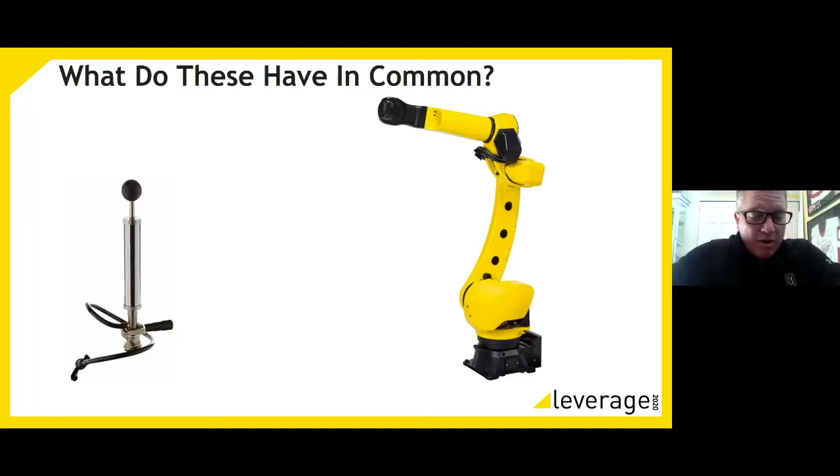So I'd like to operate under the assumption that if you're listening to this talk today, you're looking at buying machine tools or looking at automating machine tools. So today we're gonna start out with a little joke because I kind of like to joke around. I like to think about what do these two things have in common. Obviously the one on the left is something I was very familiar with in college, and on the right there is a robot. But I like to use the analogy that they're both used to tap into unrealized potential. And if you're here on this webinar today, you're looking at optimizing your machine tools and optimizing your automation.

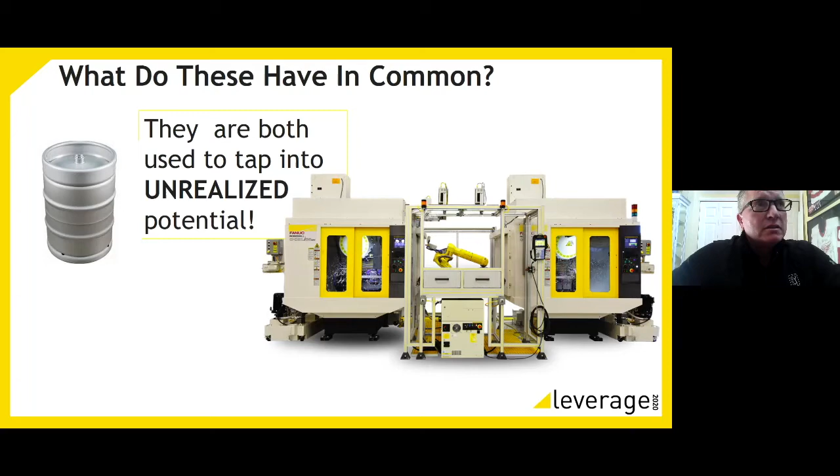Robots and machine tools together create an amazing synergy. So the things that we're going to talk about today is why are we going to automate your machine and what synergies are we looking for? We're going to address some key numbers that you may have heard before, but if you're looking to make that decision on finally automating or finally buying that machine tool, these are good reminders and good numbers to make sure that you're prepared for what the future has to offer us. And then we're going to look at what COVID has done a little bit and some early on comments by Mark Cuban. And then we're going to address some myths.

If you're looking at automating your machine tool, you've got a workforce to address and be concerned with, and they may have some antiquated theories and thoughts about what robots really are. We're going to discuss a few challenges of the machine shops just at a very high level, as well as some of those solutions, and also introduce the CRX as a cobot to the rescue in the machine tending space. And then the last slide will just be how we can connect you with the Productivity team and the FANUC team to make sure we offer you the solutions that make your shop more productive.

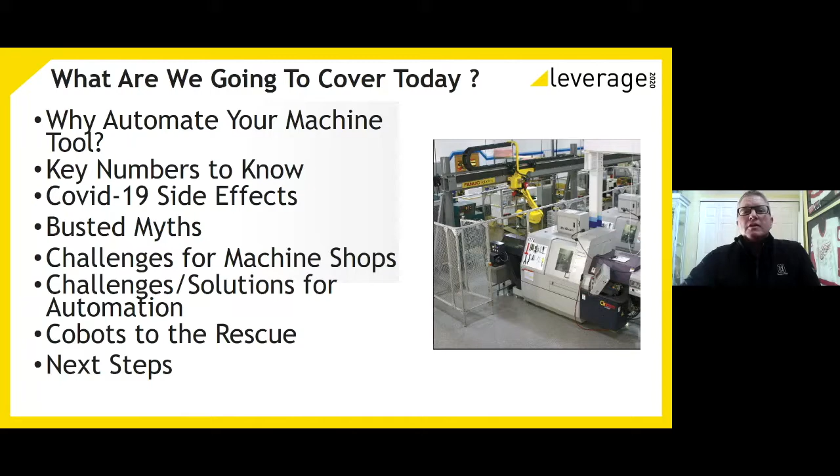So to jump right into it, we're looking at a shortage of 3.5 million jobs in the next 5 to 10 years. That's a very scary number to me because those numbers are very difficult to ascertain. 2 million today, right now, is what is required to fill the skills gap. And I had the privilege of speaking with some recent graduates at Oakland University, and I asked the question, how many of you would like to go work with robots when you graduate? And every hand went up. But then I asked the question, how many of you would like to be working in a factory? And unfortunately, there were not very many hands in the air.

And I felt to myself that it's very unfortunate that the student of today does not have a grasp of what today's factories are. They've been growing up under the assumption that the assembly line under Henry Ford is what factories are, and that is the furthest thing from the truth. So there is a paradigm shift that is required. And I think that what today's environment is going to afford us is the opportunity to expose robots and machine tools to the masses. Another key number as to why automation is going to be expected is the number of Americans that are retiring on a daily basis.

I actually think COVID is going to accelerate some of this. For those of us in the workforce and in the machine tool space that are in the last 2 to 3 years of our career, fortunately I'm not there yet, but for those of you that are lucky enough to be there, you may say that this environment is not what you want to do and you may retire early. But regardless of what COVID is doing, an average of 10,000 Americans are retiring daily, and that's just out of our industry, I believe. Let me double check that number. 10,000 Americans retiring out of North America. Let me say that, I'm confident there. Sorry about that.

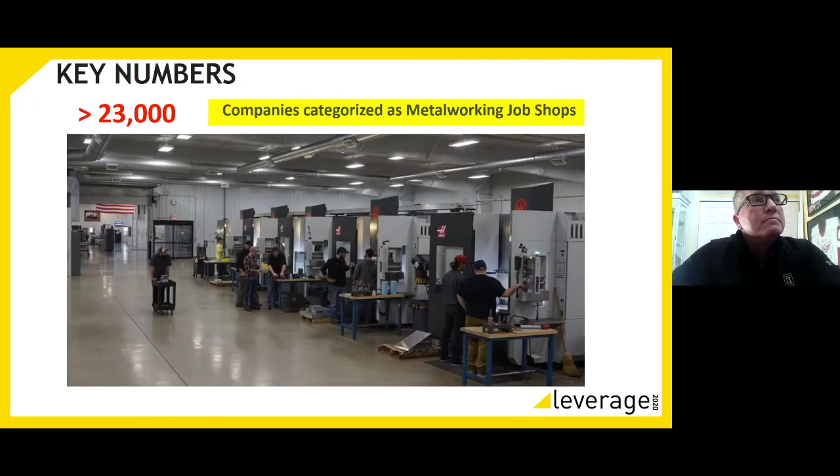Another key number is in the United States, we estimate that there are over 900,000 CNC machines installed. FANUC has a very high privilege of being one of the most common machine platforms on the market today. So having the robot and the machine tool talk is obviously a huge goal of everybody, to make that connection easy, to optimize your machine tool and to optimize your robot.

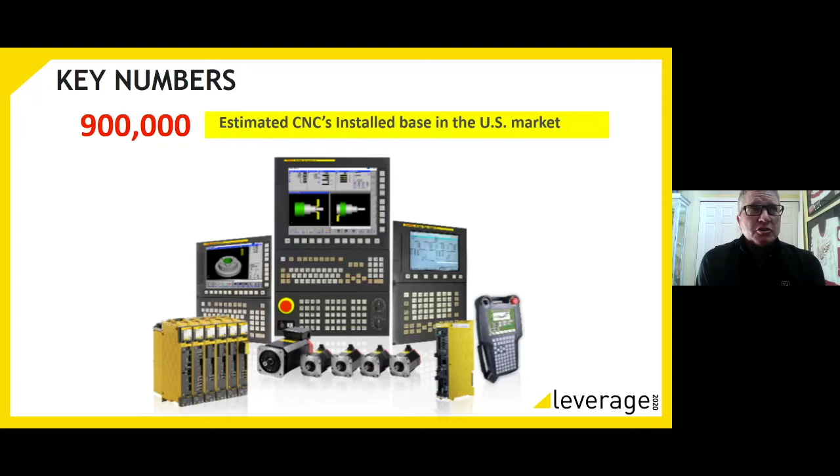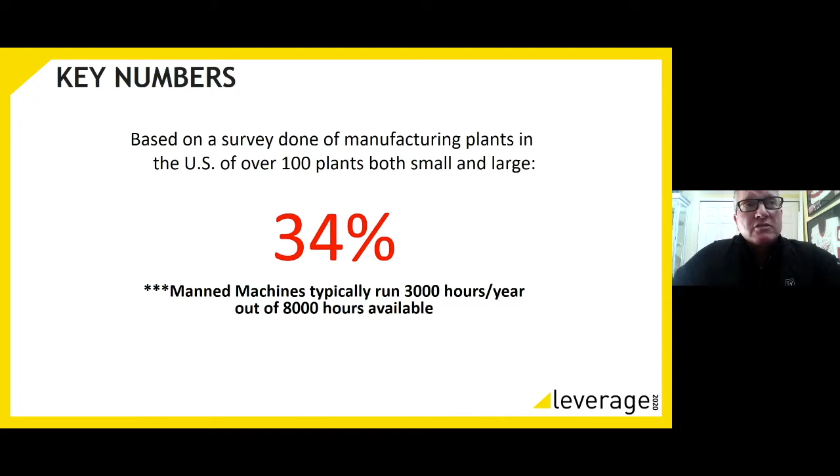The 34%, that's an interesting number. Right there is the average spindle utilization number that we got from the AMT and the NTMA numbers, that 34% of spindle utilization is where we find ourselves. And the irony is if you ask most plant managers, they would probably give you a number somewhere in the 70s to 80s, if they were feeling optimistic. But in reality, based on 3,000 hours and having 8,000 hours available, 34% is the average spindle utilization.

Another scary number, 92%. That's 92% of the machines in North America do not have a robot in front of them. So if we're averaging 34% machine utilization on roughly 92% of the machines in the United States, that would lead me to believe that there is a ton of capacity that we can do right now with the existing workforce. And robots will be the key to making sure we bring these two numbers closer together.

So a little change also. Are there other reasons that you would want to automate your machine tool? It's great to know that people are going to be at a premium and at a shortage, but also applications that are different, heavy, hard to handle parts where an operator can't handle them, especially without an overhead crane. FANUC makes robots for anywhere from 2,300 kilograms all the way down to half a kilogram. But if you have an application that's heavy, dirty, and dangerous, FANUC has the machine that will be able to help you optimize your machine tool. I should have said the robot.

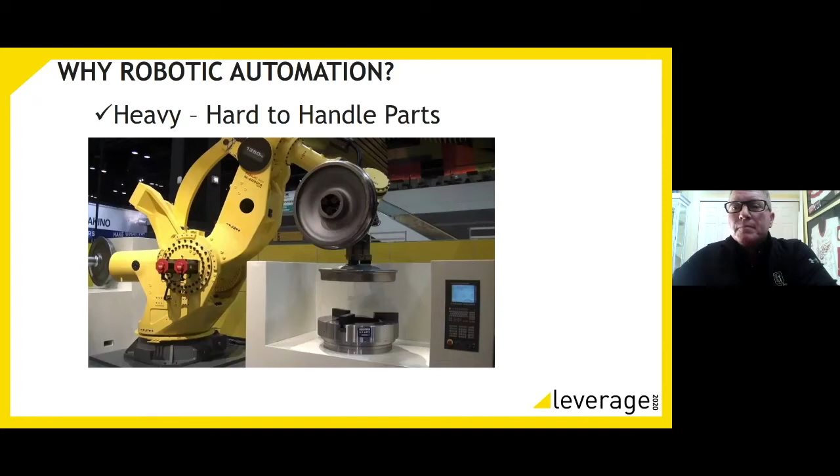Another reason to automate is consistency. If you're running multiple shifts, it becomes evident, and actually it happens quite frequently, where the communication from op to op or even line to line is difficult, but when you start going shift to shift, people start to lose sight. Robots offer a consistency because they don't care if it's first shift, second shift, or third shift.

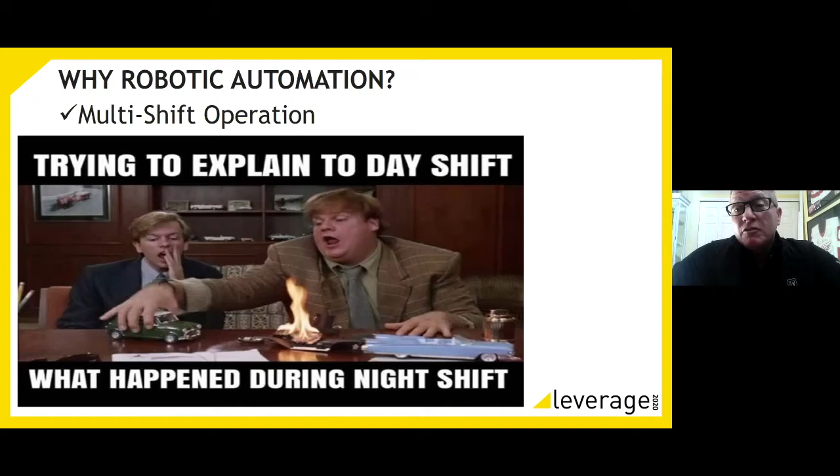We kind of already addressed this a little bit, but people are expensive. They're very expensive. Robots will offer you a consistent cost measure along the entire life of your project or your run. Cost associated with changing would be where you had to change maybe EOATs because the parts may change, but the robot path and the robot itself will give you years and years of life.

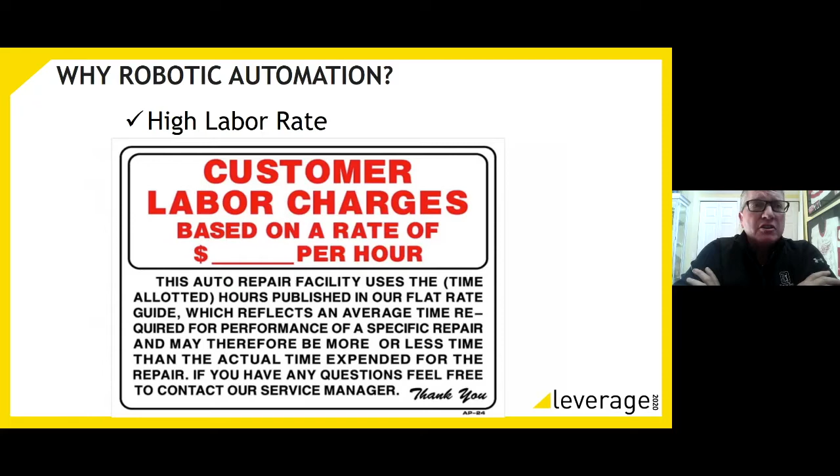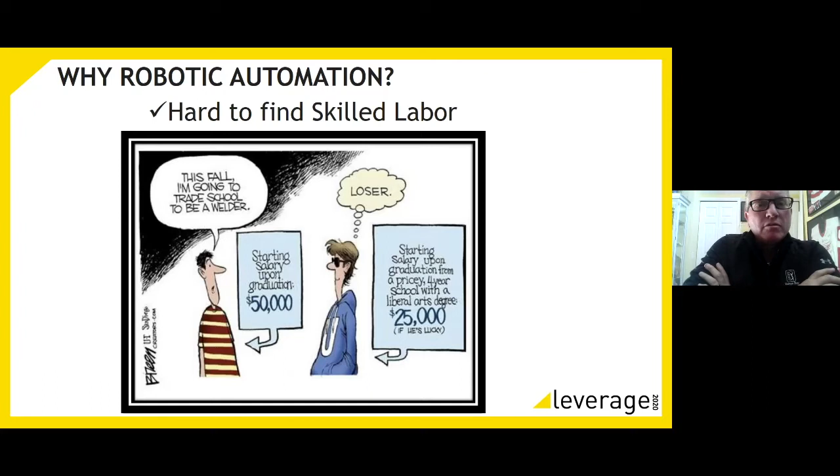And again, I keep going back to the skilled labor. A lot of kids are coming out of college thinking that the world's going to be their oyster, and it's actually changing. I think you're going to see that apprenticeship programs and internships are becoming more and more prevalent, so people learn real job skills instead of, no offense to anyone who has a liberal arts degree, myself included, although a very good degree, I think sometimes it can be a little bit impractical for that first person coming out of college. Learning a skill such as programming a robot or becoming an engineer is something I think that this country needs to turn more towards. That's my opinion.

Another reason you want to automate is dirty, dangerous, and strenuous operations. Of course, people have been doing these jobs on the assembly lines for a number of years, but in order to make things safe, robots are another key opportunity to make your process safe. Whether we do it with a bunch of robots in a cage, or what we'll discuss later, collaborative robots and some collaborative applications, robots can help keep the worker safe.

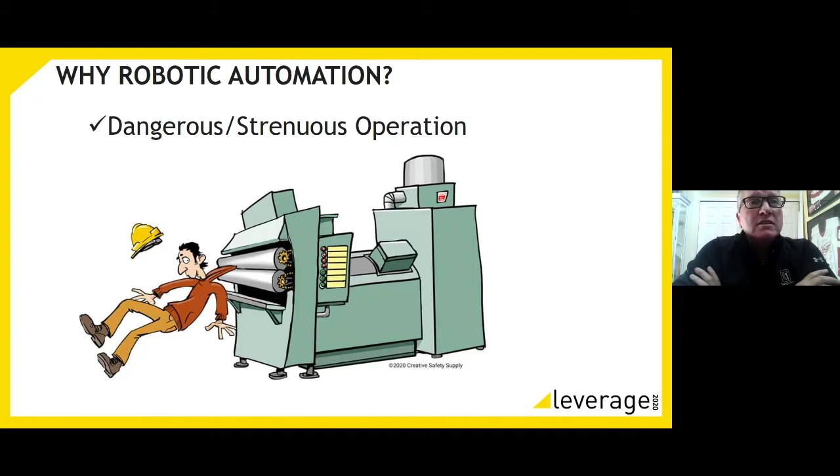Another reason you may want to automate your machine tool is because you focus on a cost per part. If you have customers that you charge by, I need 50 parts of this and 50 parts of that, robots are a great opportunity to do that when you focus on cost per part, because they're consistent, repeatable, and reliable.

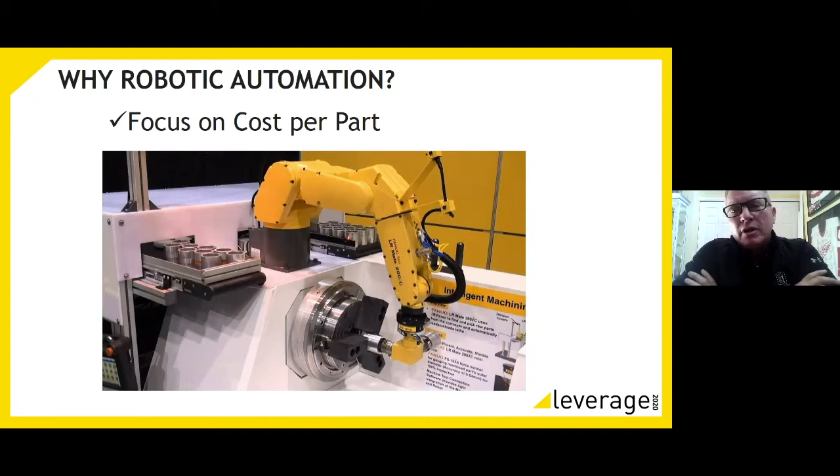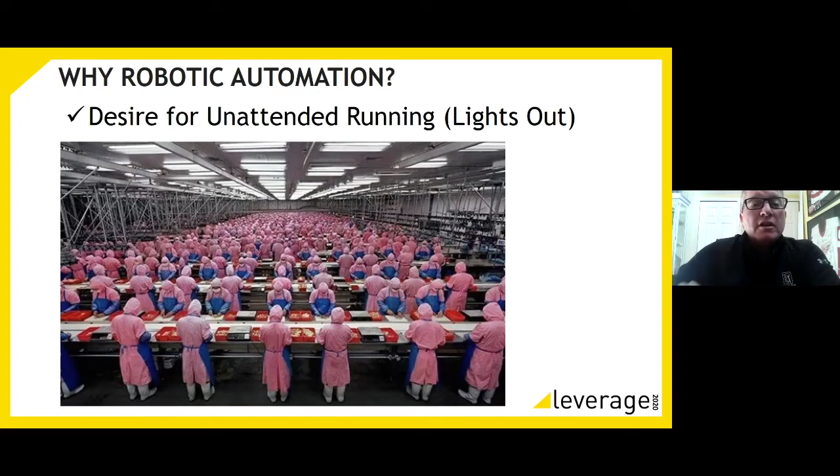The opportunity to run lights out with automation is definitely a goal that I hope a lot of people have. But initially, if you're a first-time user of automation, we want to get you optimizing your spindles, making sure they're turning and cutting parts. So in the desire for running lights out, I did have a good example of a video. And this is out of one of our factories in Japan.

Whoops, I apologize. I got to click it on this screen.

So this is actually in our servo motor plant, assembling servo motors in Japan. We currently deploy just under 4,000 robots in the manufacturing of all of our products, from robots themselves, servo motors, and any other component that goes into them, including PCB boards. Obviously, we take automation seriously, and for those of you who are familiar with FANUC, you can see that some of the robots in these videos are many, many generations old, meaning in excess of 15 years, and still run reliably.

And if you have been paying attention to the news, you may have heard a news article recently that FANUC Japan announced that we're going to increase production by a factor of 3. That is an amazing feat that we would not be able to do if we did not have robots as the core of our manufacturing processes in Japan.

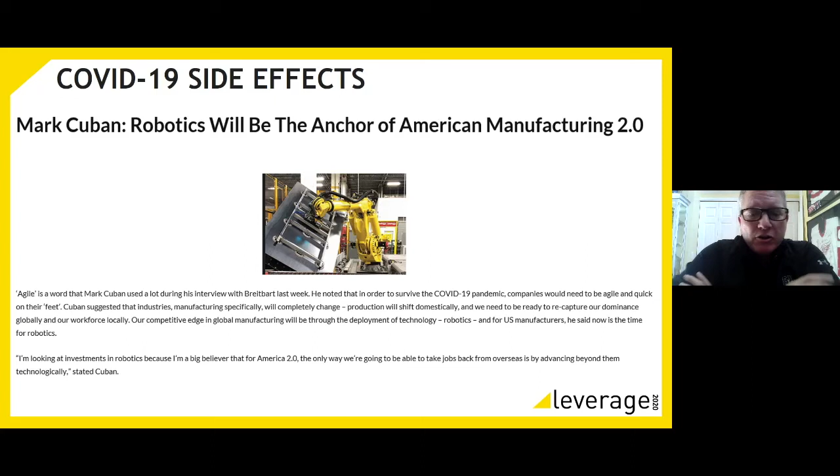So another thing we wanted to discuss was COVID and what COVID has done to disrupt supply chains. And everybody here has their own opinion. I'm sure we're so far into this now, and some of this is obvious. COVID-19 affected our supply chains. What are we going to do about it? Mark Cuban said that robots are going to be the key into America 2.0, and nearshoring and onshoring are going to be those key effects. Bringing jobs back from China, from the Asia Pacific, and bringing them back to the U.S., Mexico, and Canada. So onshoring and reshoring are going to be a huge part of it.

We go to market in 2 ways. We go to market with our partners and our ASIs like Productivity, and we also have direct relationships with the large manufacturing-based companies across the planet, which are also serviced by our ASIs. And in each one of these companies, we have robot programmers, service people, technicians, people that are specific to a technology like welding or vision, and then also the plant manager and operation and shift managers that are responsible for all those robots. So in each environment, an argument can be made that for every robot installed, 5 jobs are created.

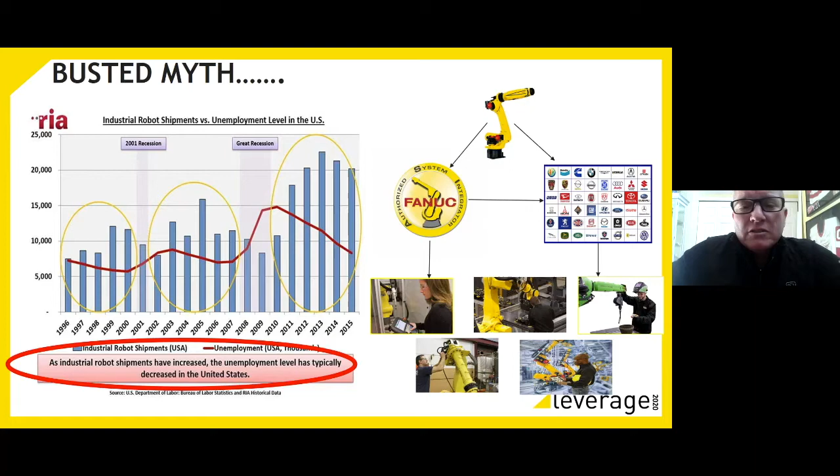But the real driver is cost. The cost of labor is going up because people are at a premium, where robots are a manufactured component. And as I stated earlier, we're going to increase production by a factor of 3. And the CRX can be one of these drivers in the machine tool network. It is a very easy to use, easy to program, collaborative robot that a first-time user can have a machine tended in less than an hour.

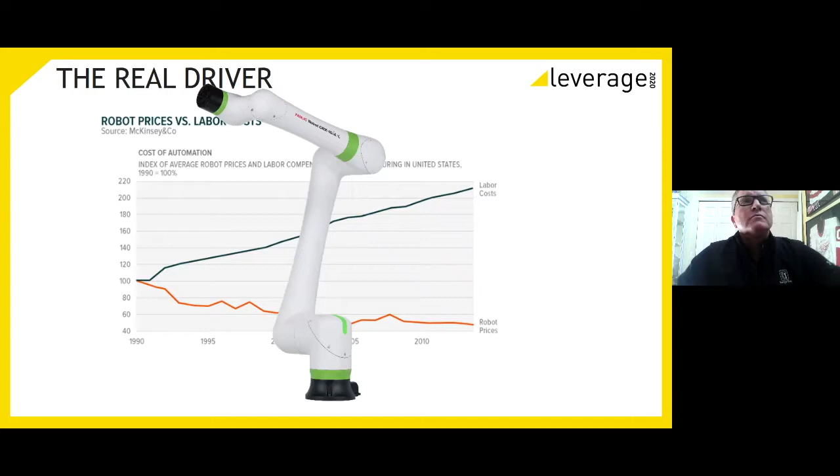So we've provided an easy solution. We've provided many solutions along the years to address these challenges, and the challenges haven't changed. Production, capacity, cost, part variation, which is one now that the robot industry has been able to address. You know, the high mix, low volume, or low mix, high volume types of applications. The tooling has become so flexible that we can run hundreds and hundreds of parts with the same tooling just by changing fingers.

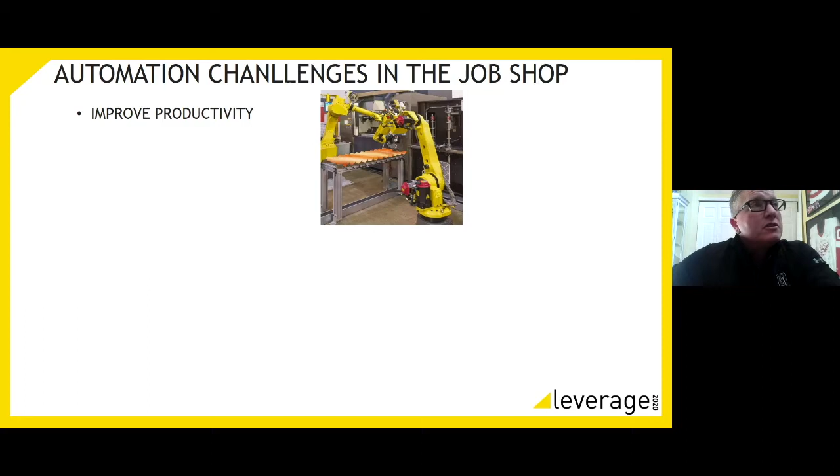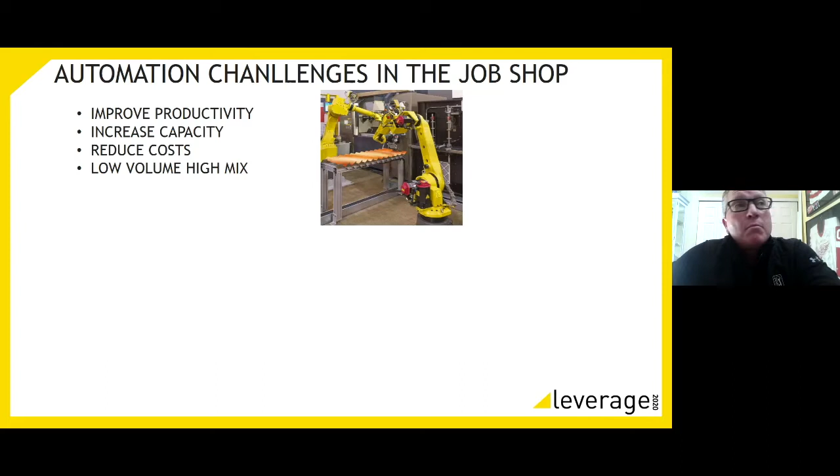So other challenges you have are, you know, floor space, throughput, lack of a common platform, even from line to line, shift to shift, and then trying to manage that with an ERP system or an old Excel sheet, or back in the day, just a card file. So in the job shop, we do face a number of challenges. We want to improve productivity, increase capacity while reducing costs, while focusing on some of the challenges like low volume, high mix. But the whole goal is to keep the machine running.

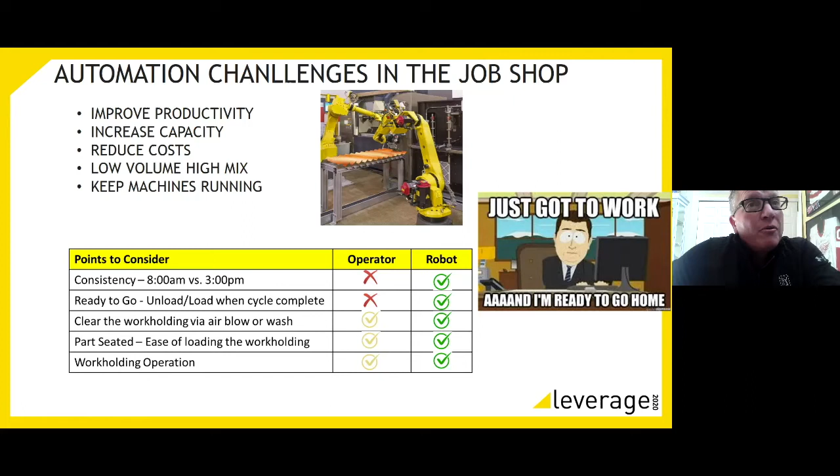So you look at a few points to consider. You look at the consistency from 8 a.m. to 3 p.m. An operator can vary where a robot doesn't. It's ready to go. It can unload and load the cycle when it's complete. And it can also clear the work holding. Everybody knows what this is. This is every machine tool guy's favorite tool to help seat everything. Well, robots can do that for you now. I apologize, one slide too quick. So robots can do that all in one case and be consistent along the whole way.

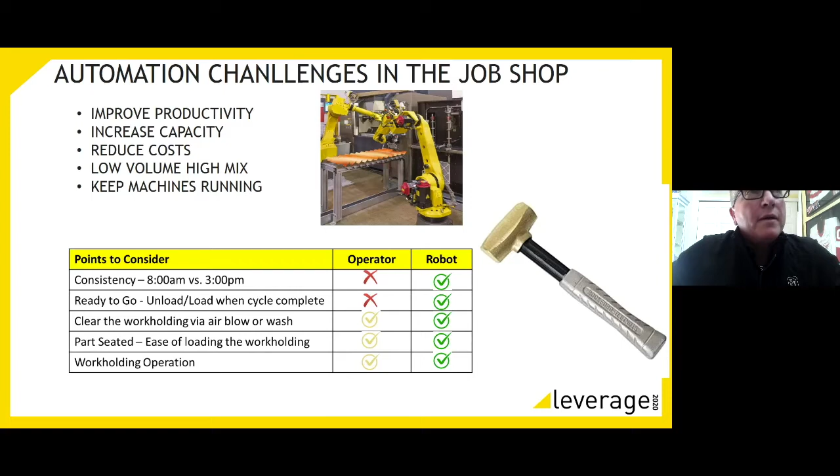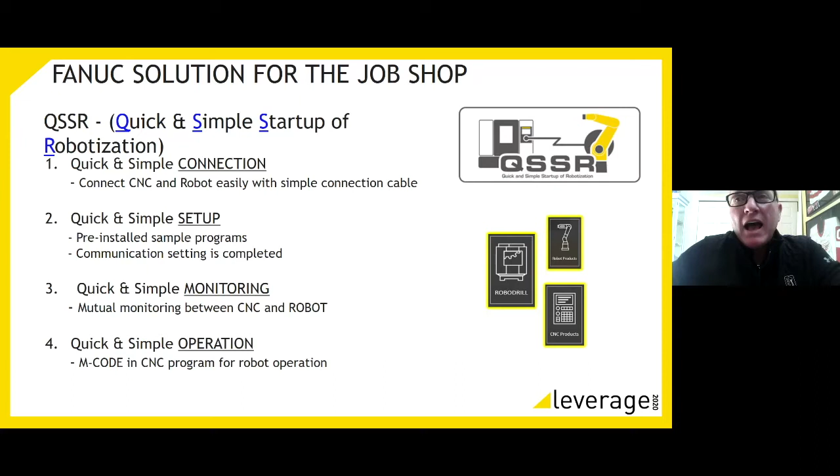So one of the solutions that FANUC has to mate a robot to a FANUC controlled machine is called QSSR. So this will go from the FANUC robot controller to the FANUC controlled machine with a simple program and platform, and QSSR stands for quick and simple startup of robotization. The whole idea is to get the robot and the machine tool speaking over FL-net in a very short time frame, so you can optimize the existing FANUC equipment you have in your plant today.

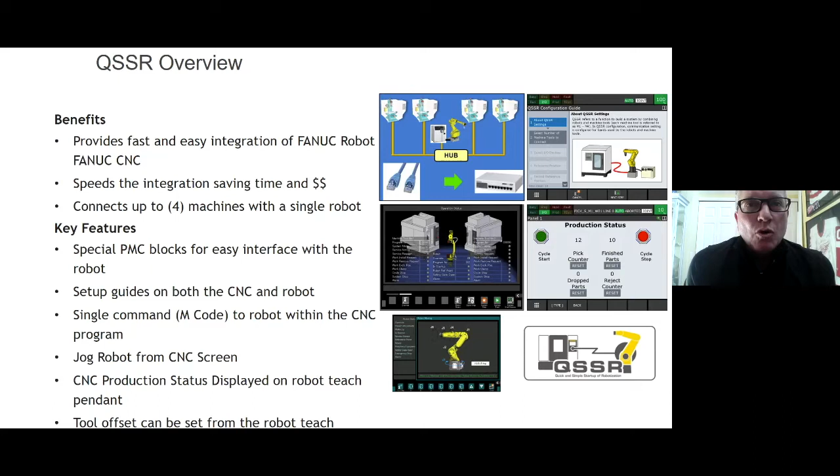So some of the features and benefits: it provides a fast connection from the robot to the CNC. It allows you to do things like jog the robot from the HMI of the machine tool. It creates the PMC blocks automatically, so there isn't code that has to be rewritten. So there are many advantages to QSSR, and it's a very detailed program. We can get into it at a later date. If you're interested, please send a note and I will connect you with the experts who can get you in minutes connecting your robot to your FANUC controlled machine.

So if you're not going to go with a FANUC controlled machine to another FANUC control, and you have other machines that have different types of control platforms, there are starting to be a lot of DIY pre-engineered work cells out in the industry today. There are a number of companies that do it. A number of our very good partners do it. Our competitors do it. So you're going to see in the space a lot of collaborative robots, but you'll also see yellow robots in these types of applications. And the idea behind them is they're quick, flexible, and easy to deploy, meaning the tooling is easy, the fixturing is easy, and the interface from the machine tool to the robot is easy.

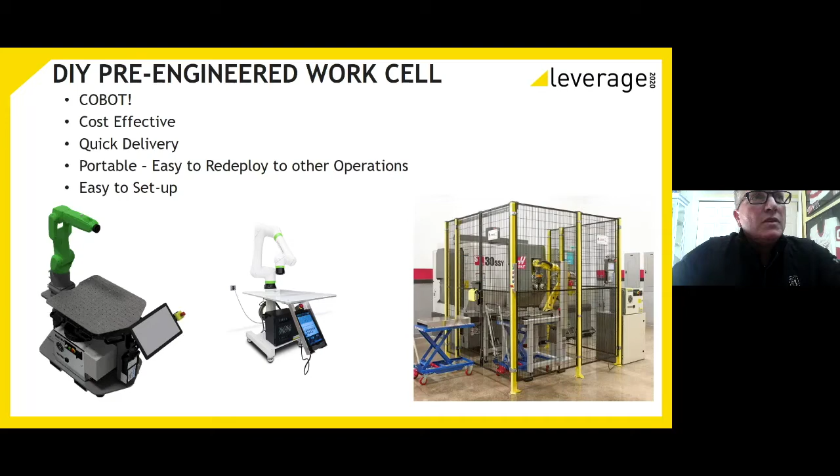So these are just a few examples of some of the partners that FANUC has across the country and the globe that do some of these applications, some of these automation cells that are easy to use, flexible, all with the goal to help you increase production while being accessible and safe.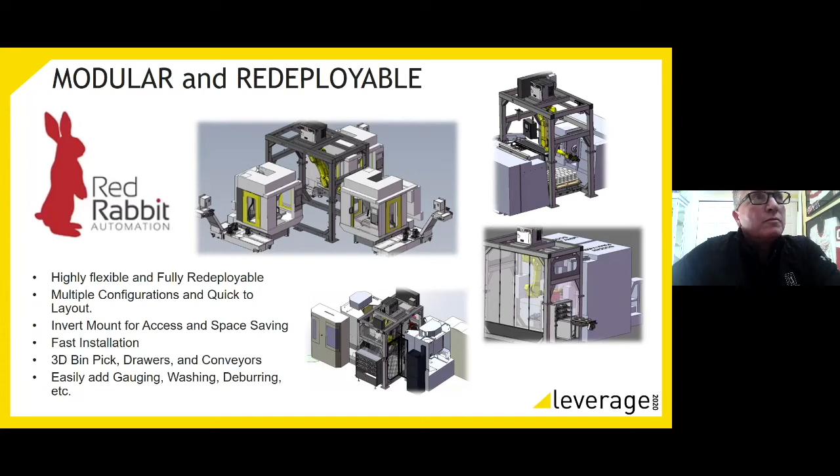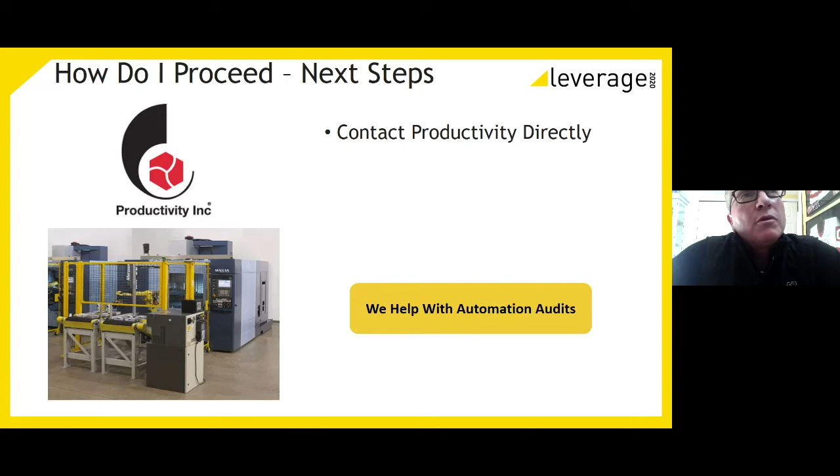So I wanted to just proceed, and how do we get to the next steps? I would contact your Productivity salesperson directly. They are the industry experts. They know the most about their machines, their machinery, and the systems that they deal with FANUC. But of course, you can always contact any FANUC authorized system integrator, myself, or your local FANUC salesperson.

And we are available to do automation audits at any time. In today's environment, we've done many of them by FaceTime, which has proved to be very successful. We can obviously do a webcast, and we can also do other things like just phone calls, or looking forward to the personal face-to-face visit.

So with the Productivity team and the FANUC team, we're here to help you address your concerns in increasing productivity, decreasing scrap and waste, and at the end of the day, improving your bottom line.